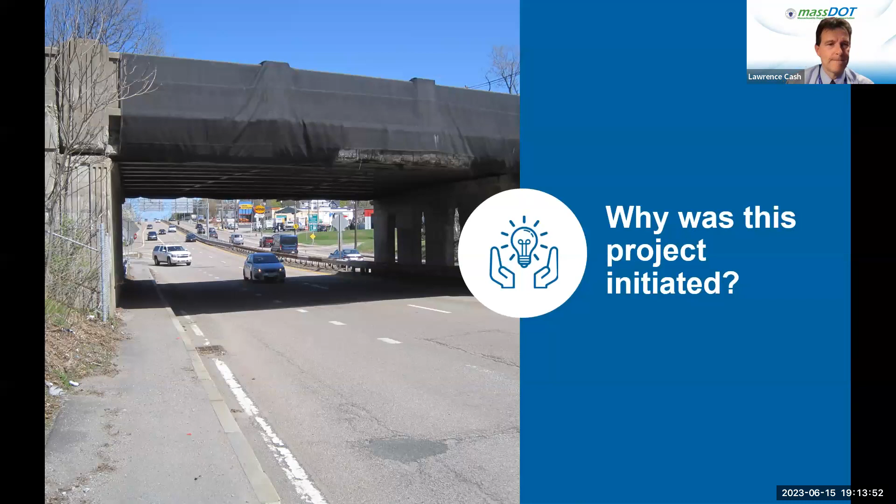This project was initiated first and foremost due to the need to replace the existing bridge, which was constructed nearly a century ago in 1931. The bridge, shown in red on this photo, is currently classified as structurally deficient. Repairs have been made in recent years, but the structure is still in need of full replacement.

The bridge also provides limited vertical clearance along Route 9, restricted to 13 feet 8 inches, and has a center pier in the middle of Route 9 exposed to salt and ice every winter, leading to additional deterioration and subsequent repairs. Knowing that the bridge requires full replacement and will impact the whole interchange due to the required stage construction to maintain existing traffic, and would be costly and a lengthy endeavor, Mass DOT wanted to seize the opportunity to not only replace the bridge structure but also address the other known deficiencies associated with the interchange.

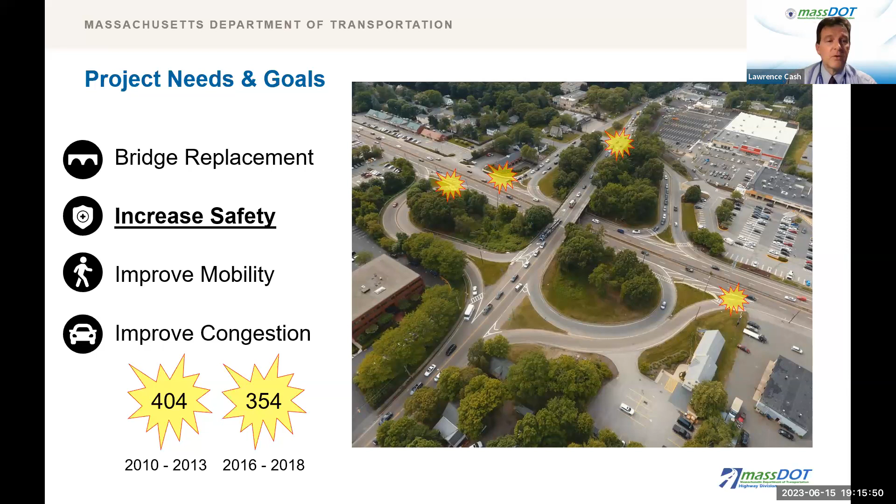While Route 9 is certainly a vital corridor for thousands of commuters every day, we understand that it also functions as a barrier between the residential communities in the south and the destinations, including schools, restaurants, shopping, and other businesses located to the north along North Main Street.

Currently, there are no bicycle facilities throughout the interchange. There is also no continuous accessible sidewalk for pedestrians along the segment of Route 27. This results in a barrier for both pedestrians and cyclists, and a location where there are few options to safely cross Route 9. This project will improve mobility for all users of the interchange.

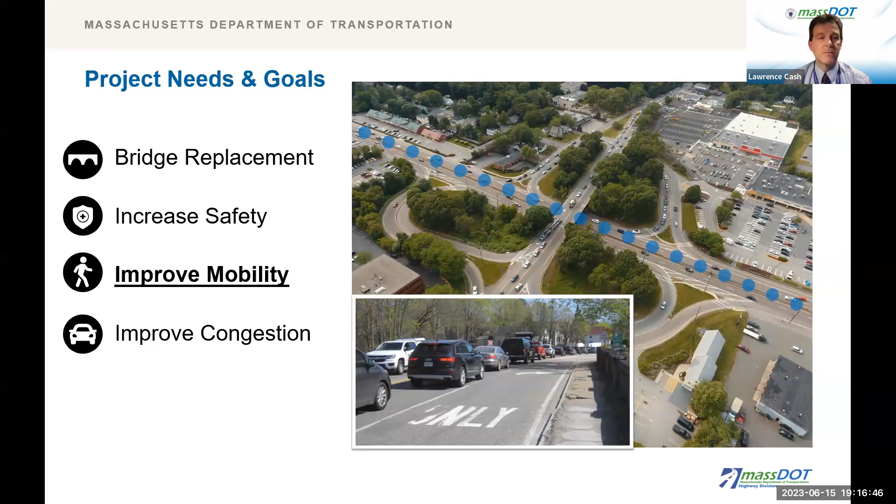As mentioned previously, on average, over 80,000 vehicles travel through this location every day, leading to congestion and delays. A more efficient design is needed to better process this demand while safely accommodating all the mobility needs of the community.

Here we have a drone video taken in June 2018 showing typical congestion in the area during the afternoon peak hour. There is heavy traffic along Route 27 southbound, and the Route 9 on-ramps are backed up as motorists wait for acceptable gaps to pull into the Route 9 traffic. If you look at the ramp toward the bottom of the screen, you'll even see a black vehicle making an illegal left turn, which highlights the frustration and unsafe driver decisions happening in this area experiencing heavy congestion.

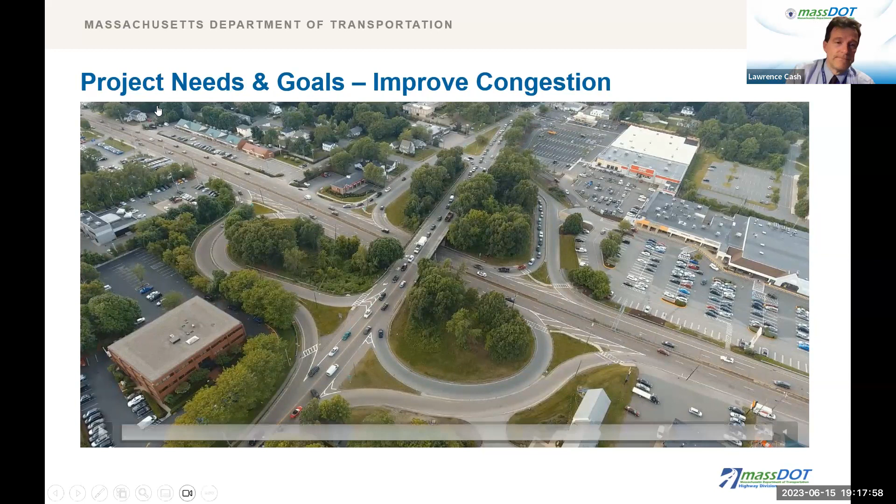So the question is, how do we attempt to solve these issues we've just identified?

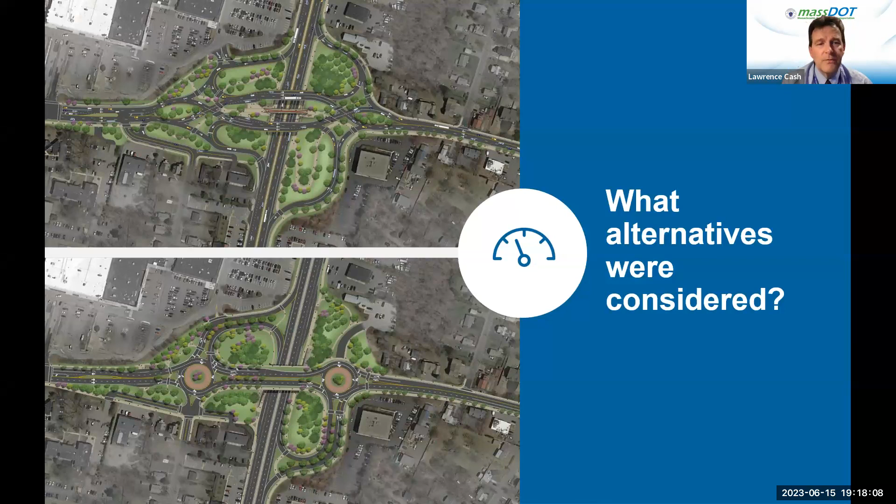Starting at the beginning, the town initiated the design back in 2010, 2011 with another design consultant. Then in June 2017, the design you see here on the right was presented to the public. This design proposed to remove the ramps in the northwest and southeast quadrants, the upper left and lower right portions of the interchange respectively.

Traffic signals were then proposed at the ramp locations along Route 27 to handle not only through traffic along 27, but also left turns to and from Route 9. The design included sidewalks along both sides of the road and on-road bicycle lanes.

The public rejected this design at the 2017 hearing due to various reasons. These included lengthy crossing distances at the intersections for pedestrians and bicyclists, as well as concerns about complex traffic signal phasing, which could result in additional delay, particularly for the left turn movements to access Route 9.

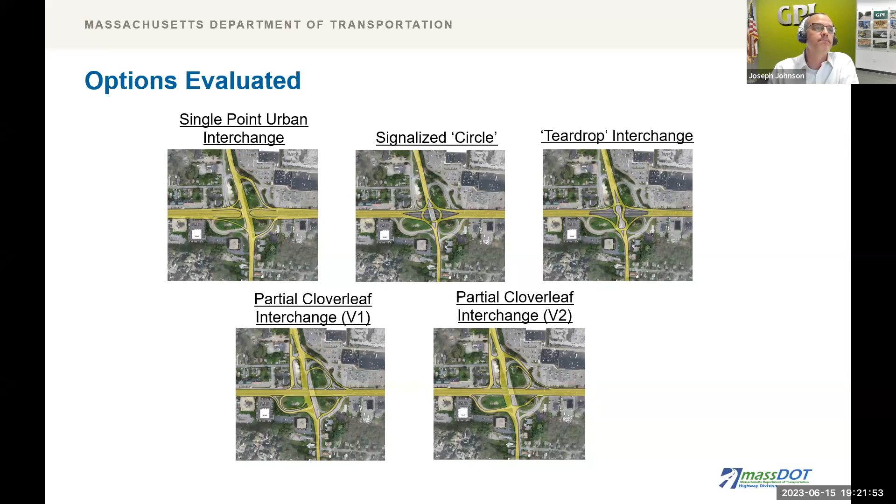The dual roundabout concept implemented a multi-lane roundabout at each interface with the Route 9 on and off ramps. This option eliminated the need for traffic signals, and as a benefit of roundabouts in general, would promote traffic calming while reducing the severity of crashes.

The dual roundabout concept also incorporated improved pedestrian and bicycle facilities throughout the project limits, accomplished using a combination of shared use paths and sidewalks. However, one challenge of this location is the need for multiple vehicle travel lanes approaching and departing the two roundabouts. To safely cross pedestrians and cyclists at multi-lane roundabouts, a modified traffic signal would be needed at each crosswalk. So although roundabouts generally operate under yield control without signals, many approaches would require signalization to ensure pedestrian and cyclist safety at multi-lane crossings.

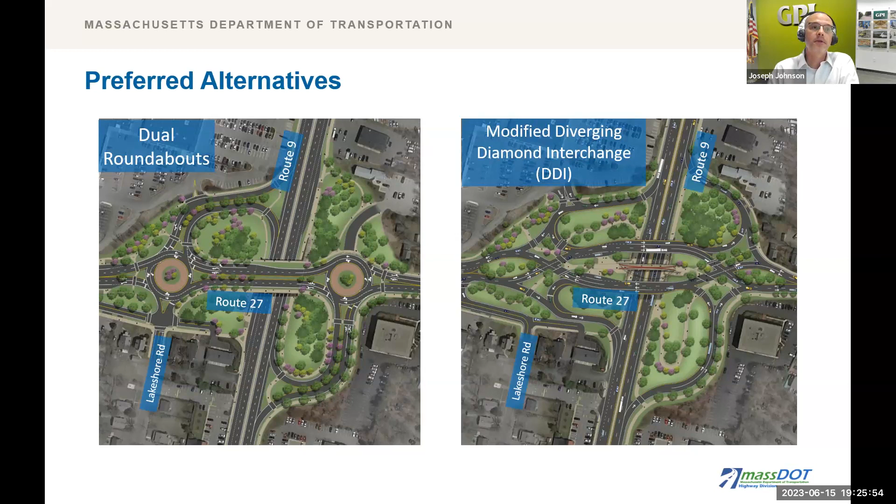These interchanges are controlled by traffic signals on either side of the major roadway, where the opposing through traffic will temporarily cross over to the opposing side of the road. By crossing the lanes of traffic, left turn movements can be processed without conflict, similar to how a channelized right turn is made. Also, since the interchange is controlled by two signals, pedestrians can safely cross to either side of Route 27.

Both alternatives, the roundabouts and the modified DDI, were presented at a public meeting held at the Wilson Middle School in June 2019. After the formal presentation, we broke into smaller groups and attendees were encouraged to provide input via a comment form listing the various goals and needs of the project. These categories included overall safety, pedestrian and bicycle accommodations, traffic operations, accommodation of U-turns, neighborhood connectivity, as well as others.

The previous 2017 design was presented alongside the dual roundabout and modified diverging diamond concepts to provide an array of options. Participants were asked to place red, yellow, and green stickers on each category for each design alternative, with space provided for handwritten comments. A red sticker indicated a negative reaction, yellow a neutral reaction, and green a positive reaction. This information was then gathered and evaluated to help determine the path forward for the project.

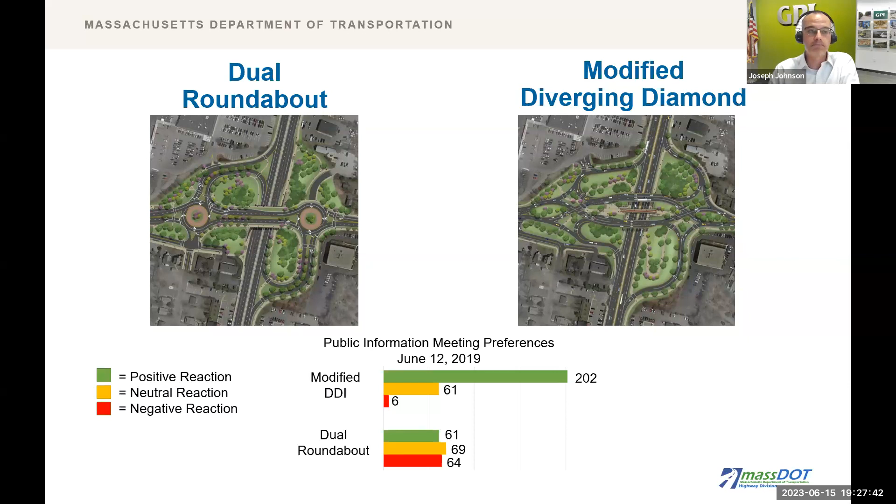One of the challenges with diamond interchanges and similar configurations is the need to process left-turning vehicles to and from the major roadway. This often requires more complex traffic signal phasing, which translates to longer cycle lengths. Additionally, to provide safe crossings for pedestrians and bicyclists, phasing must be added to allow time for those crossing as well. This isn't to say that diamond interchanges are ineffective or unsafe, it's just a different type of interchange with its own operational characteristics.

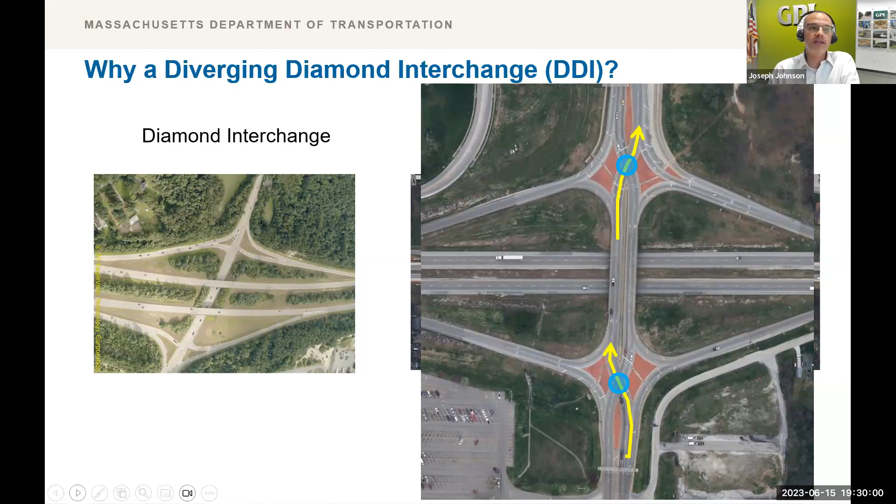So you might ask, what is the point of this? Well, the advantage of using the DDI configuration has to do with the manner in which left turns are processed.

By eliminating this conflict, the DDI can provide greater safety and dramatically reduce the complexity of signal phasing at the interchange. So to summarize, the DDI provides channelized right and left turns to the major roadway, as shown in orange on the aerial image.

As previously mentioned, this interchange in its current configuration has been prone to crashes. According to Federal Highway, total crashes were reduced by 46%, and left turn crashes were eliminated completely by implementing a divergent diamond relative to a traditional diamond interchange. So the DDI at this interchange, rather than using a more conventional configuration, will assist in reducing crashes and improving safety.

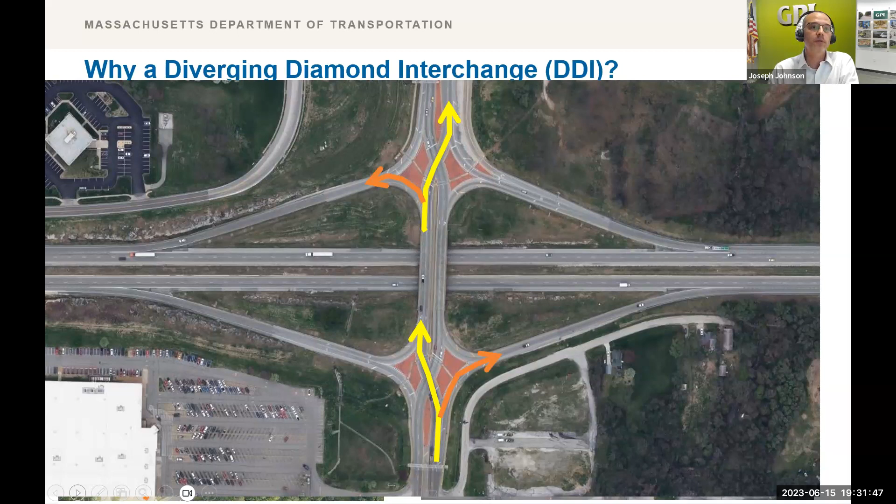When it comes to pedestrians and bicyclists, the DDI allows for crossings to occur at the same time as through traffic, eliminating the need for additional phases. These pedestrian crossings will occur without any conflicts with traveling vehicles.

Now we'll talk about the difference between a traditional DDI and the modified DDI that we are proposing in Natick. As shown on this slide, we overlaid an example of a more traditional DDI to show the impacts of a standard configuration and how that wouldn't work at this location. These yellow circles show how the ramp alignments would severely impact adjacent properties and businesses. These impacts are obviously not reasonable nor feasible. Many DDIs have been built near large, sprawling interchanges over major interstates, where this type of ramp geometry can be easily accommodated. However, when it comes to our location in Natick, we needed something much more context sensitive.

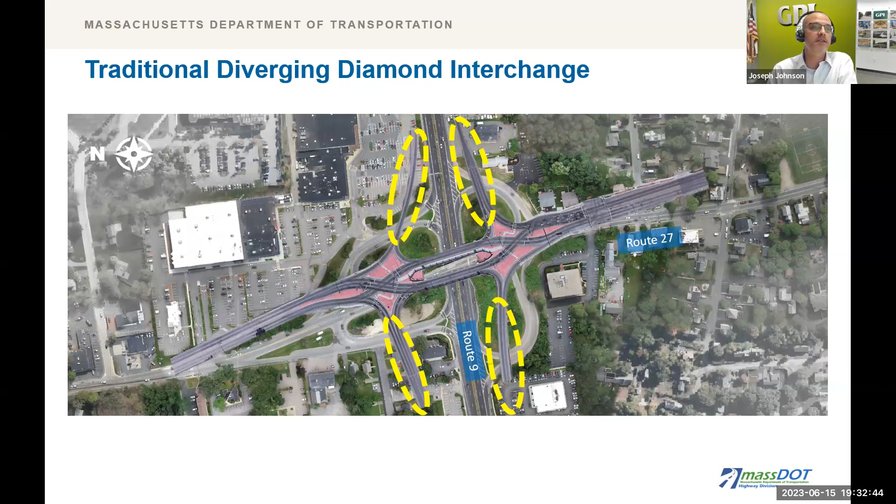At this point, I'd like to transition the presentation to my colleague, Chris, to further explain the details of the Natick modified DDI.

Thanks, Joe. Hello everyone, my name is Chris Howard with GPI, and I am part of the design consultant team for MassDOT. Here we have a rendering of the proposed modified DDI with Route 27 shown left to right and Route 9 shown vertically.

But what exactly does the modified term mean in this sense? Essentially, the ramps and overall geometry have been modified to fit within the available right-of-way as much as possible while still adhering to federal highway design guidelines. This provides a smaller footprint that is much more context sensitive to the Natick community.

Instead of a more typical diamond shape as Joe described earlier, we maintained the basic shape of the existing ramps, but with many improvements to maintain safe and appropriate low speeds on the ramps, while eliminating the stop conditions that exist today. Appropriate acceleration and deceleration lanes have also been proposed along Route 9 to eliminate both the dangerous weaving that exists today and to allow vehicles to achieve appropriate speeds before entering or exiting Route 9.

Before we get too far into the details of this design, we wanted to say that we fully acknowledge an aerial view looking down at a DDI can appear quite complex. However, the driving experience is far simpler than you may assume. So let's jump right into a video showing what it would be like to experience driving through this new DDI.

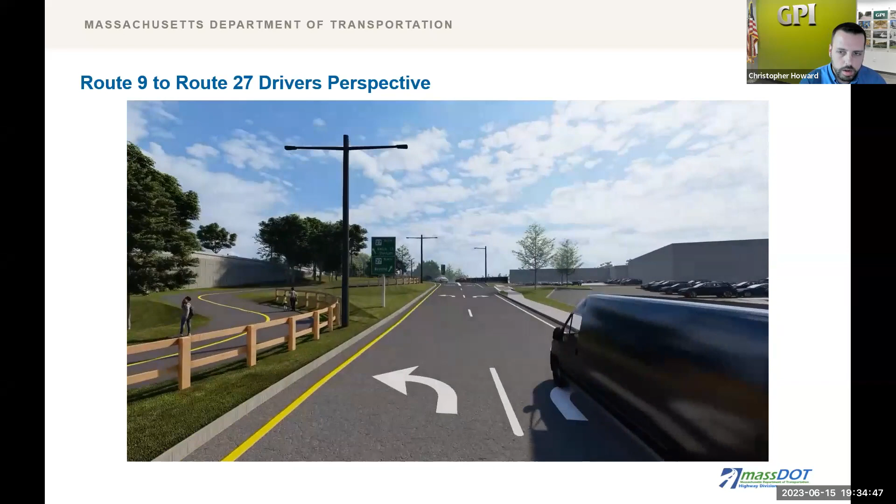As we turn onto the ramp, off to your left, you'll see the westbound bus stop and the new shared use path connecting up to Route 27 through the infield area. On our right is the 927 Exchange Plaza.

We will then stay in the left lane so that we can continue south on Route 27. As we approach the top of the ramp, we encounter the first simple two-phase signal and continue our journey onto Route 27.

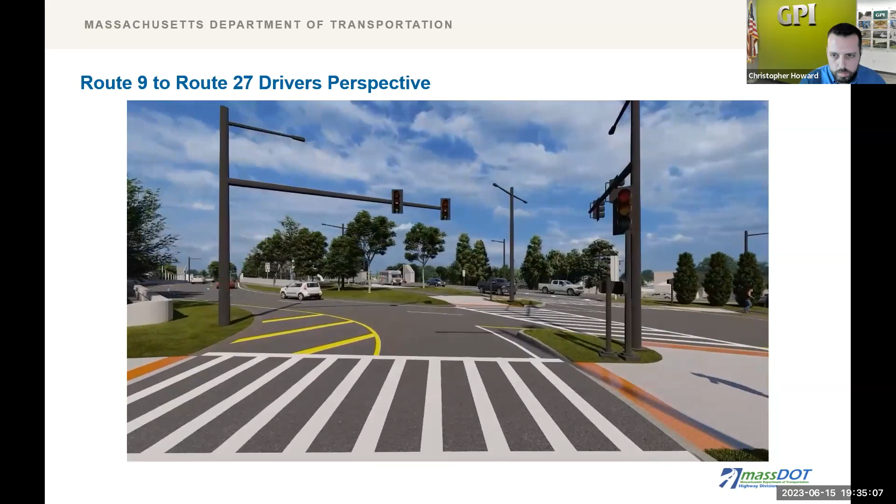Off to the right, you'll see a new bus stop and the shared use path continuing through the center of the interchange with plenty of separation from vehicular traffic.

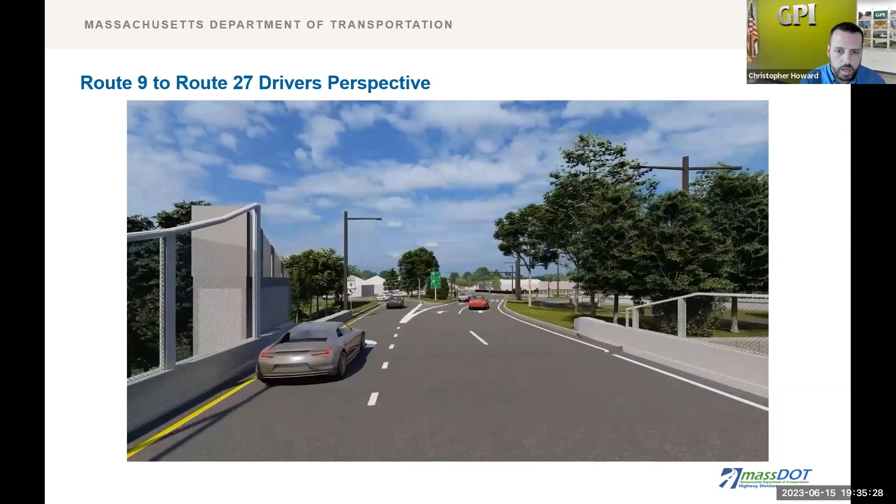As we cross over the new bridge, you'll also be able to see the new signature exclusive bike bridge and pedestrian bridge in the middle. We then continue, and you can notice the easy U-turn provided as we pass by the left turn onto Route 9 East. We now approach the second simple two-phase signal and cross back over to the right side of the roadway and can continue to Natick Center.

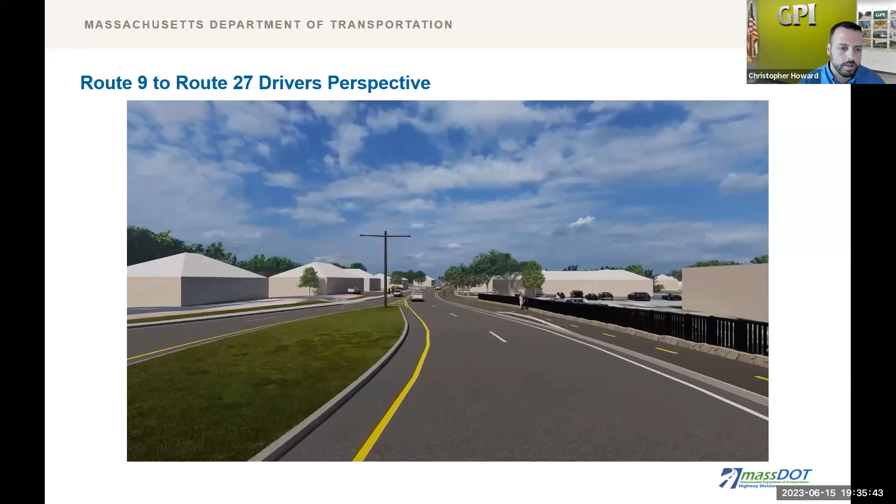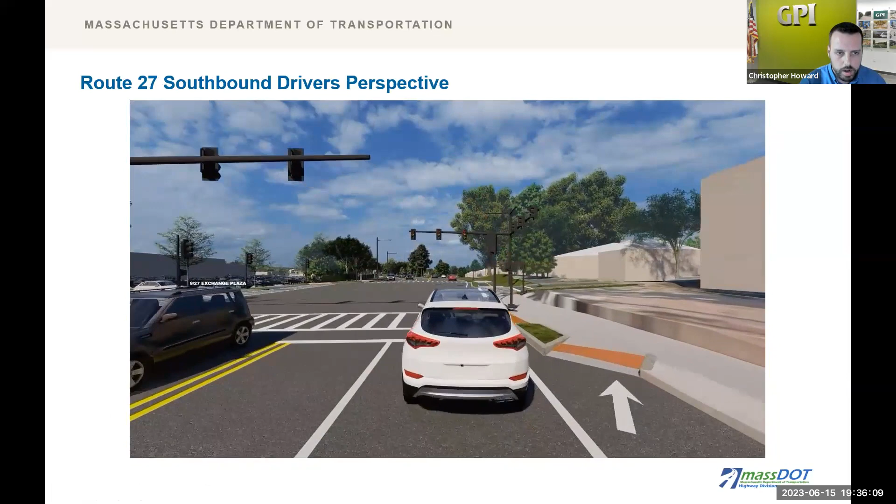Just to really demonstrate the experience, we wanted to show one more video that runs along Route 27 as if we were coming down from the Pike and heading south again towards Natick Center. Here we are at the 927 Exchange driveway on the left, and we will continue driving south toward Route 9. You'll notice the shared use path network on the right and on the left side of the screen as well. This provides safe, separated accommodations for pedestrians and bikes.

Next, we will be coming up to the intersection that would take you to Lakeshore Road. A new queuing area can be seen on the left to allow for easier and safer access from Route 27 to and from Lakeshore.

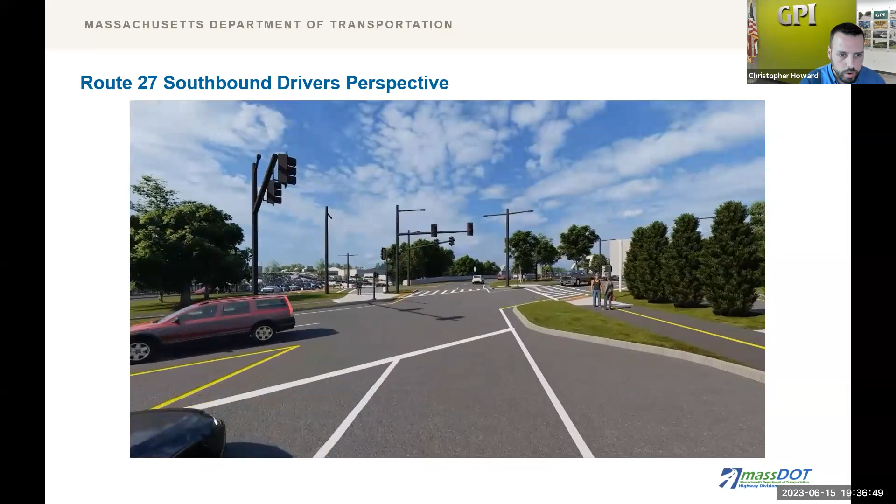We're now passing the on-ramp to Route 9 West, and just beyond that, one of the new bus stops as we approach the northern traffic signal. We continue straight through the intersection, passing by the shared use path, up to the new tied arch bridge. And we would continue on just as we have seen in the previous video.

We hope those videos gave you a feel for what driving through this interchange will be like. It was also important to note that this project has carefully taken into consideration the other major projects that have been or currently are being constructed in the immediate area, tying into the Route 27 project at both the northern and southern limits, blending the project designs together, and minimizing additional work required where these projects interface.

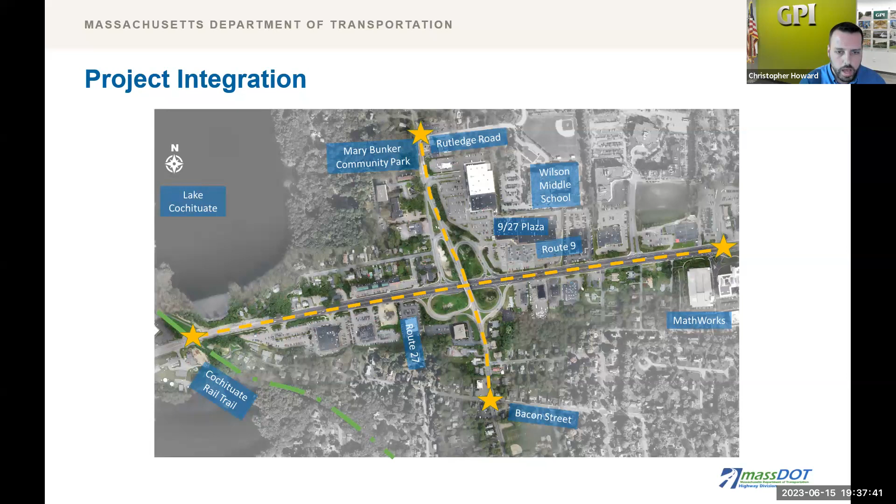We also intend to bring direct connectivity to the Cochituate Rail Trail shown on the left side of the screen via shared use paths and extending improvements that were made along Route 9 as part of that rail trail project as well.

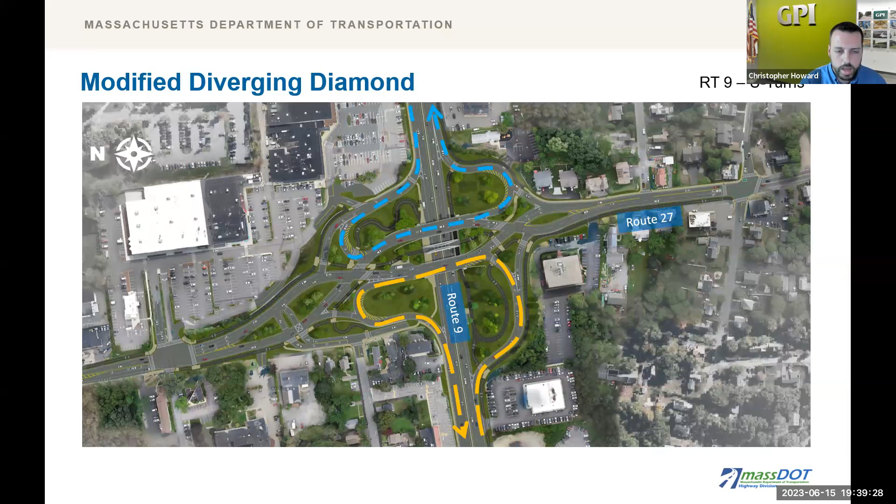As part of the 2019 meeting, it was noted that a lot of vehicles along Route 9 use these interchanges to reverse direction, essentially performing a U-turn. By making these movements as simple as possible, it minimizes the impact to more local traffic on Route 27. In this instance, vehicles traveling either east or west on 9 can take the off-ramp, head over their respective bridge, and turn back onto Route 9, reversing direction. This is a much more efficient movement than if this were a traditional diamond, and adds to the benefits the DDI brings to this location.

We hope we've provided some insight on how to drive through this interchange, but we want to highlight the truly multimodal advantages this design brings as well. Providing safe, high comfort facilities for pedestrians, bicycles, and transit users continues to be exceptionally important to MassDOT, and this modified DDI design really exceeds on that front as well.

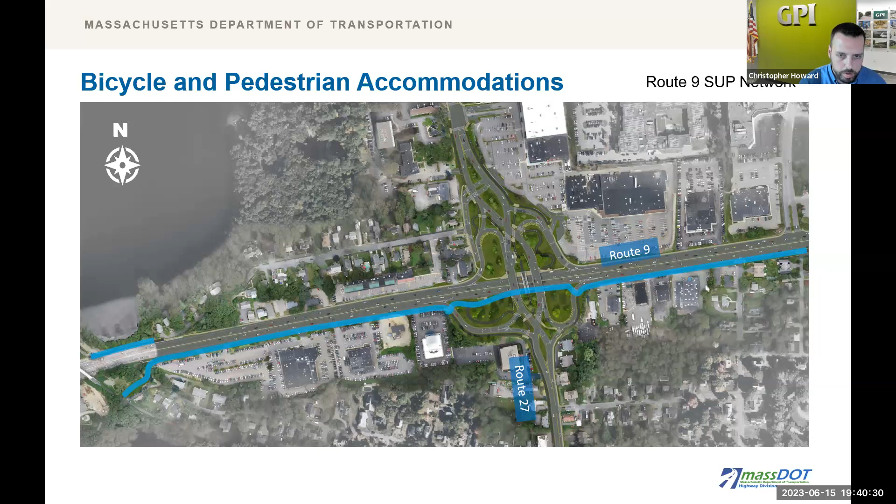And here we have rotated the image 90 degrees to now show Route 9 horizontally. The project provides a shared use path along the entirety of Route 9 East, connecting the Cochituate Rail Trail at the western limits all the way to Linden Street and the MathWorks campus in the east.

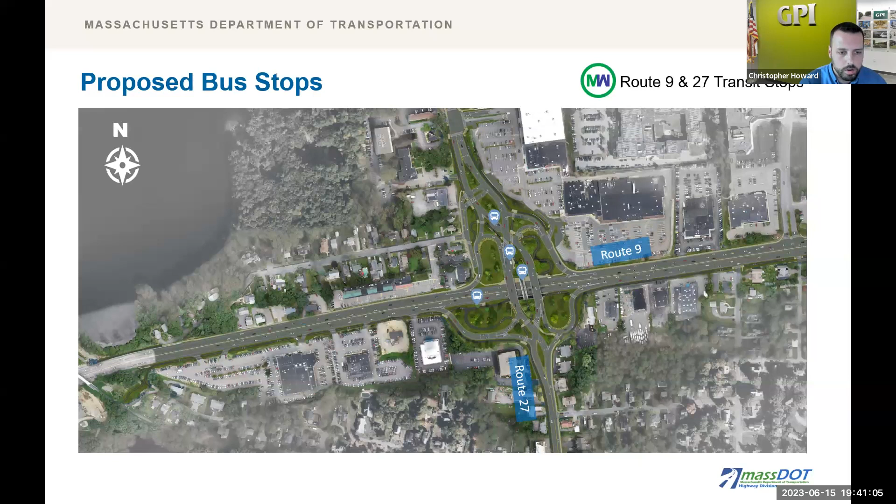Currently, the Metro West Regional Transit Authority, also called the MWRTA, has two routes that run through the project limits. One along Route 27, picking up and unloading passengers in the 927 Exchange Plaza due to there being no formal stops along Route 27 in this area. The second route runs along Route 9 and stops on either side of the interchange, depending on direction. Currently there is no connectivity between these two routes, but we aim to change that by providing formal stops along Route 27 and using the shared use paths and sidewalks to provide a link between both routes.

You may also recall one of the issues noted by Larry earlier in the presentation was that the existing bridge provides low clearance over Route 9. All 3 new bridges will be constructed approximately 4 feet higher than the existing bridge, to align with federal highway guidance for clearance on Route 9 and allow elimination of the pier that sits in the middle of Route 9 today. This will provide extended durability for the new bridges, keeping vital structural components further from road salt during winter months. The guardrail separating Route 9 will also be replaced with concrete barrier, extending the improvements that were installed as part of the Cochituate Rail Trail project to the west.

Roadway lighting will also be enhanced to provide safer accommodations for all users as well.

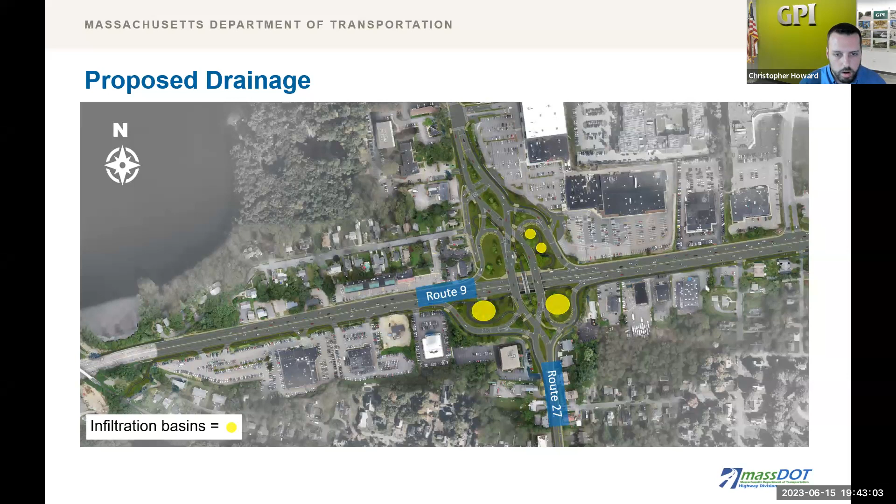The design has gone through several iterations to get to this stage, and we continue to make refinements. It was noted in the comments received at the 2019 public meeting that access to Lakeshore Road as part of the DDI was still a concern.

The area was revised to provide a 2-stage approach for accessing Lakeshore Road more safely. The design has had several outside reviewers during the design process, including MassDOT and other consultants considered DDI experts in the industry.

Mitigating impacts to private property continues to be extremely important. While eliminating every impact is not feasible with such a transformative project, we continue to refine the design wherever possible to minimize them. This project's design occurred during the height of COVID, in which traffic was very low compared to pre- and post-COVID times.

New traffic patterns have been evaluated to ensure the design is still appropriate and adequate. Extensive utility and geotechnical investigations have also been performed to minimize unexpected impacts to utilities or other structures during construction, which would otherwise typically lead to additional delays.

And now let's take one more look at the design via a bird's eye view of the entire project. We begin positioned above Route 9, looking east toward Boston. The 3-bridge design is centered, and as we rotate around, the interconnected shared use path and sidewalk network becomes even more visible.

We end up over Route 27, looking north, and could see the first crossover leading up to the new bridges. The 9/27 Exchange Plaza can be seen off to the right as we continue over Route 9 and through the second crossover, leading up to the improved connection to Lakeshore Road.

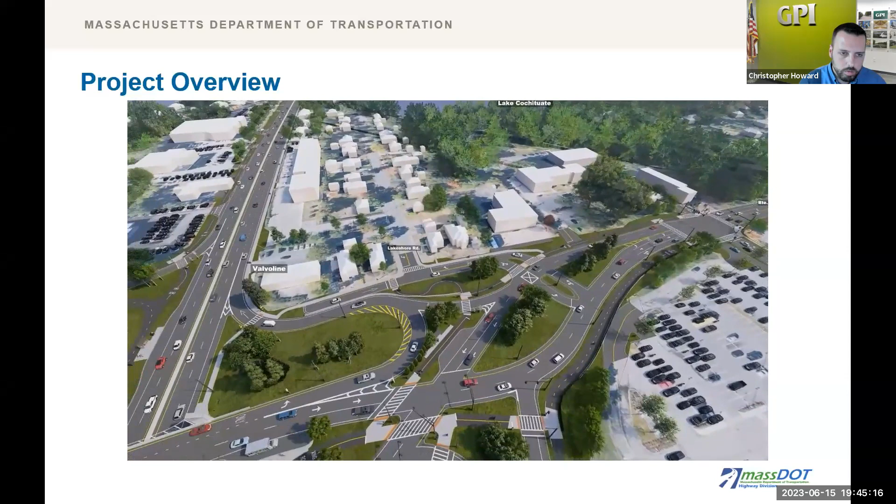As we pan back out, the entire project comes into view: the modified diverging diamond interchange carrying Route 27 over Route 9.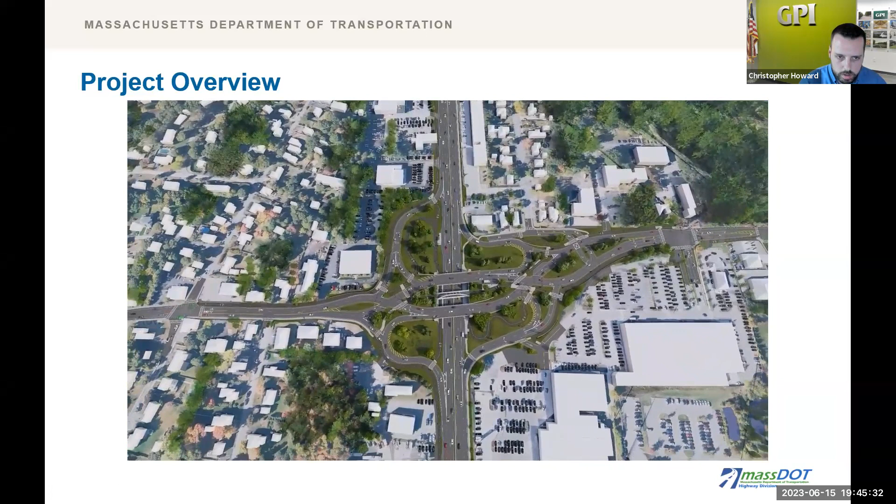At this point, I'd like to hand it off to Melissa to discuss the right-of-way aspects of the project. Thank you, Chris.

Good evening. My name is Melissa O'Day, and I represent the Right-of-Way Bureau of the Massachusetts Department of Transportation Highway Division. The Right-of-Way Bureau is responsible for acquiring all the necessary rights in private and public lands for the design, construction, and implementation of this project.

Affected property owners have been contacted by personnel from the Right-of-Way Bureau representing Massachusetts Department of Transportation Highway Division. The procedures used must comply with state and federal regulations governing the acquisition process. Affected property owners' rights are protected under Massachusetts general laws, primarily Chapter 79.

If a project is receiving federal funds, the property owner's rights are further defined under Title III of the Real Properties Act of 1970 as amended. All right, thank you, Melissa.

What are the environmental, cultural resource, and community impacts? Regarding environmental impacts, MassDOT will be coordinating with the MEPA office to determine reviews that may be required. We will also be filing a categorical exclusion checklist. There will be no work within or alteration of jurisdictional wetland resource areas.

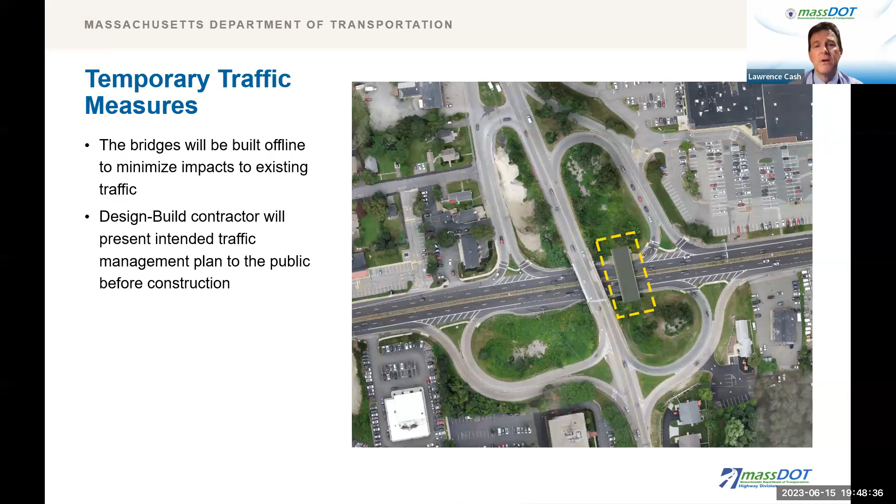Construction impacts: access will be maintained during construction. Existing pedestrian facilities will be maintained, along with access to businesses, access to Lakeshore Road, and access to existing traffic during peak travel times.

Temporary traffic measures: pedestrian detours may be necessary. Nighttime rolling roadblocks could be necessary for erection of beams, or even closures on the Route 9 section as a rolling roadblock, just for the installation of anything overhead on the bridge structures. No planned road closure on Route 27, as traffic will be maintained.

Now for project delivery, as we said, we plan on using a design build procurement. Design build combines the design and construction services into a single contract, authorized for department use under Massachusetts General Law 149A, subsection 14 to 21. This allows the contractor and designer to work together on all phases of the project.

What I wanted to ask about is the design program you described. Maybe you could put up the slide showing the modified DDI. One question that's particularly important to Bernardi Volvo: it appears that with this design, a customer exiting the Volvo dealership, which is right by the ramp where you're zooming in, on the ramp traveling eastbound, will have no choice but to get onto the exit ramp of Route 9 and travel south on Route 27, because it looks like you're changing the curbing. I thought I saw a bus stop right there on Route 9, so they're not going to be able to continue east on Route 9. Is that correct, or are we misunderstanding the design?

I can start, Joe. I believe right there on the bottom of the screen it's just showing a little bit of a deceleration lane onto the ramp. I'm not quite sure where the driveway is located there, it looks a little bit further down on the page, but that's what I'm seeing.

Yeah Larry, I can chime in. That configuration is actually going to be quite similar to what exists today at the Volvo dealership, where there will just be striping for that exit for the off ramp, but no curbing, so access to Route 9 eastbound will be provided. They'll just have to pull across the decel lane, which is a similar situation that exists today.

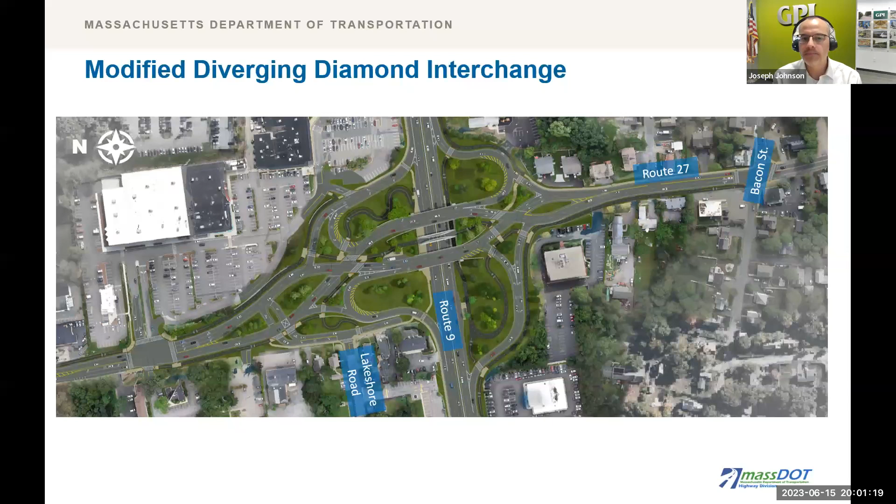I appreciate that. So you guys have studied that driveway, which is right there just off the picture, and you're satisfied that a vehicle will be able to pull out, make a right and go eastbound, and have enough opportunity not to be forced into the deceleration lane and then forced to go up to Route 27 southbound? That's correct. Yep. That's correct.

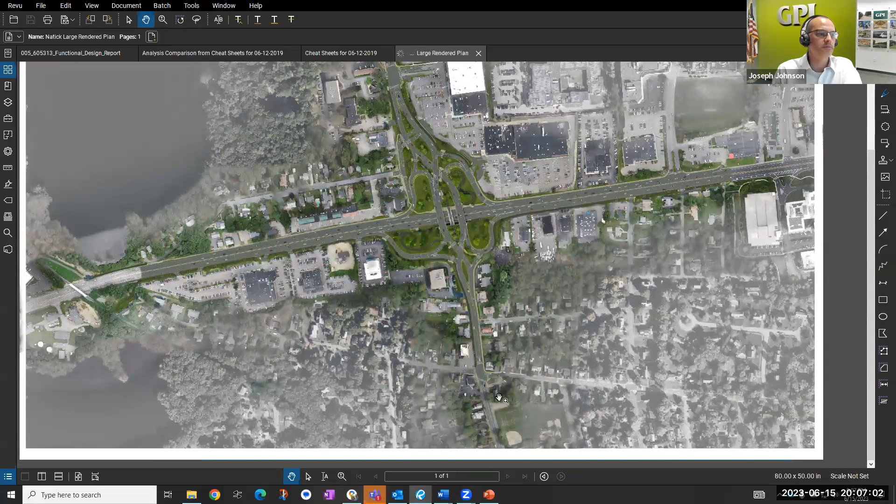Okay, can you see my screen? Yes. So here's the interchange as a whole. I thought it'd be easier to show in one large plan here. The question is relative to North Pleasant Street, which is right here, and Bacon Street at the bottom. I believe the question is whether or not this would become a dead end street, and the answer is no. We're looking to maintain that connection as it exists today, there will continue to be access here.

Some of the changes occurring in this location: we'll now have two southbound travel lanes continuing from the interchange all the way down to Bacon Street, and we'll continue to have the one northbound lane. So we'd expect less queuing to the Bacon Street intersection, and less queuing for the interchange as a whole. Hopefully that addresses the question on North Pleasant Street.

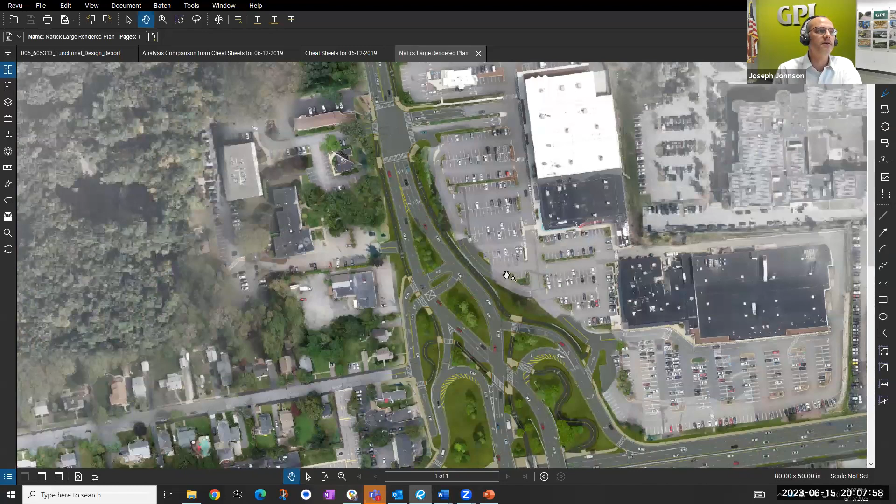Now if we take a look up at the Dunkin' Donuts, this is the signal at the 9/27 Exchange Plaza. We are not looking to make any modifications to the access to the Dunkin' Donuts, right here. That will still occur through the site. If I'm not understanding that, please feel free to chime in, but we're not intending to make any changes there.

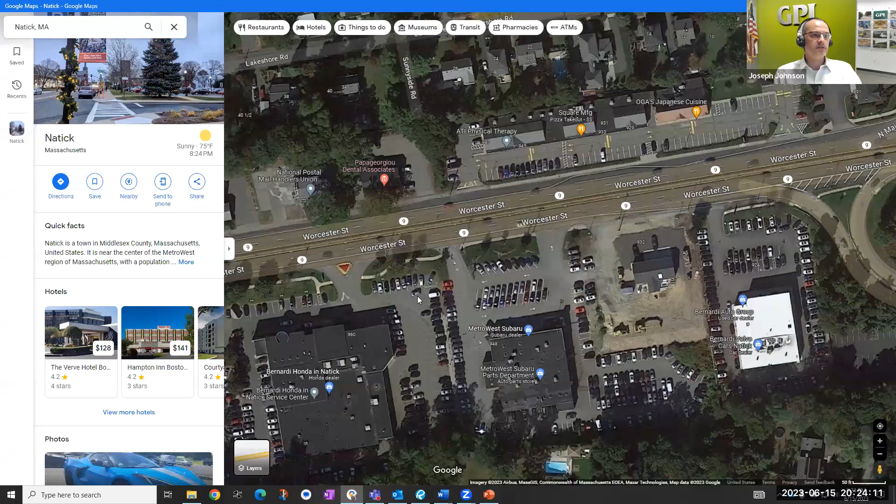Okay, so we're talking about all the dealerships essentially over here to the west of the interchange. Just looking at the existing condition, hopefully you can see the Google image here. Right now there's just a wide shoulder for much of the stretch, and there's a short, substandard decel lane right here to get off. Here's the Volvo dealership.

One of the objectives of the project was to provide a safer deceleration lane length. We want to extend this lane further because you're coming off a road posted 50, into a 25-mile-per-hour curve. There's really not enough distance to come safely to that reduction in speed. So you'll see in the proposed scenario here that we've extended that decel lane, so it's further. That provides a more comfortable decel for folks exiting Route 9 eastbound to get off.

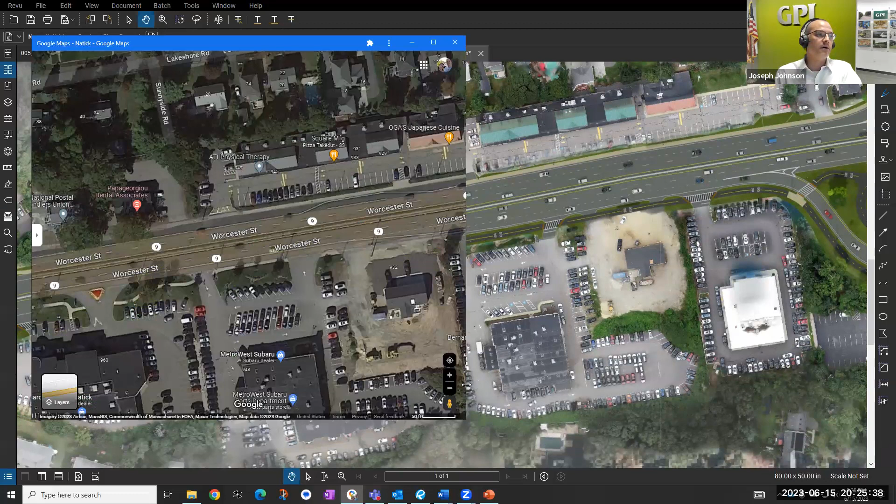Now, I understand the concern is pulling out of this driveway, for instance, or any of these. It was a large shoulder, just a wide shoulder, and now we're striping a lane. Right now, whether or not people utilize this shoulder for decel, that may or may not happen today even though it's striped to be very short. My guess is folks may enter that lane prematurely, knowing it's very short. But another thing to consider is that as someone pulls out from this driveway, you actually have a lane to travel in to merge into Route 9.

There will obviously be vehicles slowing down sooner, but I think in general we're hoping to improve the safety along Route 9 and the decel to get off. Our hope is that by providing this lane, when you pull out, you'll actually have a lane to travel in rather than a shoulder to accelerate. You'll obviously need to wait for gaps to pull out like any driveway on Route 9, but our hope is that you'll be able to pull out and make the maneuver you want to get onto the main line.

Now, I understand the comment about a roundabout. If we had a roundabout here, someone could get off—hopefully you can see my hand pointing—and come through here, travel through a roundabout, and get back on. I understand what you're saying there. To make that type of maneuver in this configuration is possible, but you'd need to be familiar with it: you come out, take the left, come here, pull that U-turn, and then come back down and get on. So it's physically possible, but not as convenient as having the roundabout.

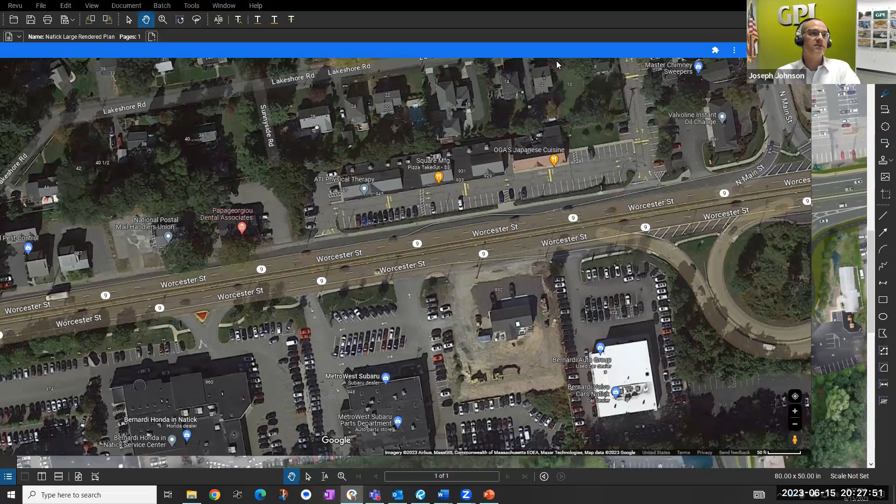But compared to the existing condition, where you have that driveway in close proximity, it's not much different for the Volvo in terms of getting out and trying to get onto the main line, choosing an acceptable gap. Hopefully with that longer lane, folks will actually be pulled over and traveling at a slower speed by the time they get to this driveway, rather than someone pulling off very quickly right where someone might be trying to pull out.

So by having a longer decel lane, hopefully that will improve the situation. Plus, Joe, the gore area is all open too, which is the same as the existing condition. So even if they traveled that far, they can still go through the gore to get into the travel lane. But I'd say exiting those driveways is going to act more like an auxiliary lane, where some vehicles coming out of the driveway are accelerating and merge left, while other vehicles are slowing down to get off this roadway onto 27. So it almost seems to act more like an auxiliary lane, and that's really what they're designed for—those type of movements off the main line.

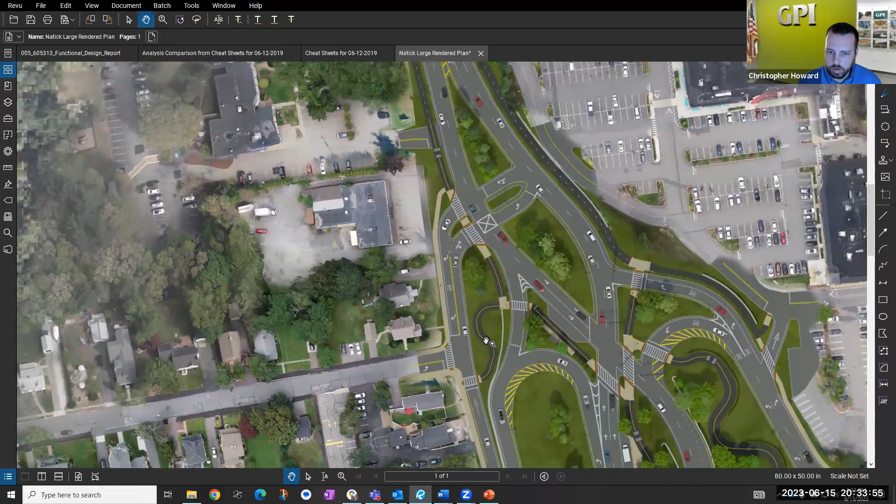And then the other question regarding that same intersection, will the merging ramps towards Route 9 have stop signs at the end, or will it be a yielding merge with flowing traffic, so you don't have to stop and back up getting onto Route 9? My concern is that Valvoline at the corner of Route 9 West, the entrance is actually from Route 9. So my concern is either they change the entrance and have to do something coming from Lakeshore Road, or the impact it might have if it's a complete moving merge to get onto Route 9, the potential for accidents of people trying to get into that driveway with a merging on-ramp.

Okay, so we can start with the question on Lakeshore. I can go over how the access is going to work there. Here's Lakeshore Road. As you mentioned, if you're coming out of Lakeshore, you'll have to take a left here, then proceed to a stop sign where you can either take a right to get on Route 27 southbound, or access Route 9 westbound, or get to Route 9 eastbound by heading southbound. So you'd take the right here or go through to access Route 27 northbound. It'd be a two-stage movement: come here, take the right only or go through considering one direction, the southbound 27, then get to the second median and refuge in the middle, and then consider the northbound traffic to take your left to continue north.

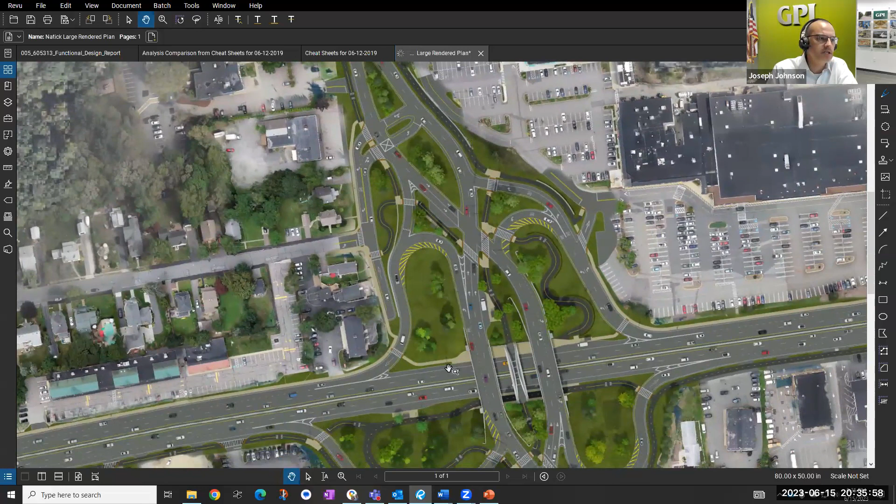Regarding the Valvoline, let's see, here's that driveway you're mentioning. Right now that's a tough location because it's very close to the bridge. It's a tough condition in the existing condition because it comes up very quickly after the bridge. The best way for someone to get to Valvoline, if you're heading Route 9 westbound, would be to get off prior to making this little maneuver, continue up Route 27, and take this turn so you could access it from the ramp. That would be the best way to access that site, because it's so close to the bridge, and it comes up very quickly once you get to the bridge.

So that would be the recommended way if you're on the Route 9 westbound main line, to get off earlier, come up, take this left, and then come in that way, because it's so close to the bridge. But you also had a question about this ramp, as you come on Route 9 westbound from Route 27 southbound. To get on Route 9 west, you'd yield to motorists coming up and getting on from Route 27 northbound that want to get on Route 9 westbound. This movement would yield to that movement here, taking that left turn. Then there's no yield, it's just an acceleration lane. If you're going to get onto Route 9 westbound, part of the issue today is there's very little acceleration lane.

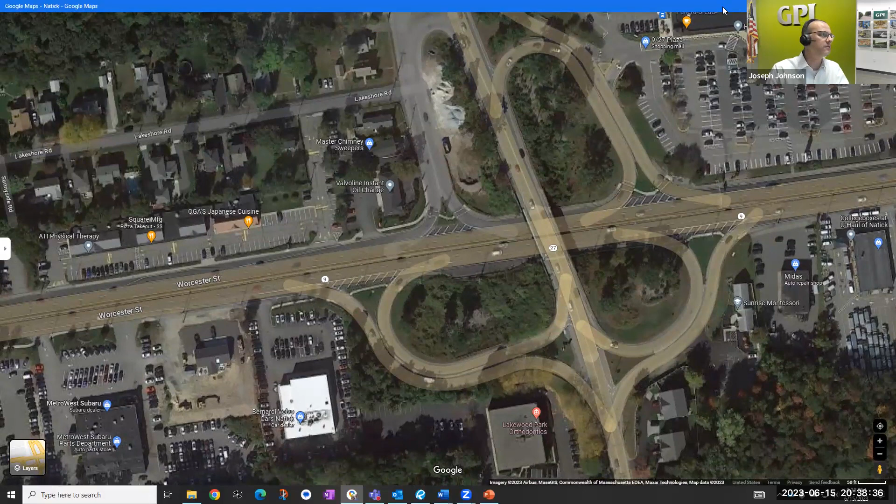So we're actually providing a legitimate standard acceleration lane so that folks will accelerate before merging into the main line. That will help prevent the backups we see today, where some ramps getting on were under stop control. It was very difficult to pull out onto Route 9 main line with very little acceleration length, going from a stop condition to 50 miles per hour. So we're looking to improve that by providing proper acceleration and taper lengths so you can merge back into the main line. Hopefully that answers your questions.

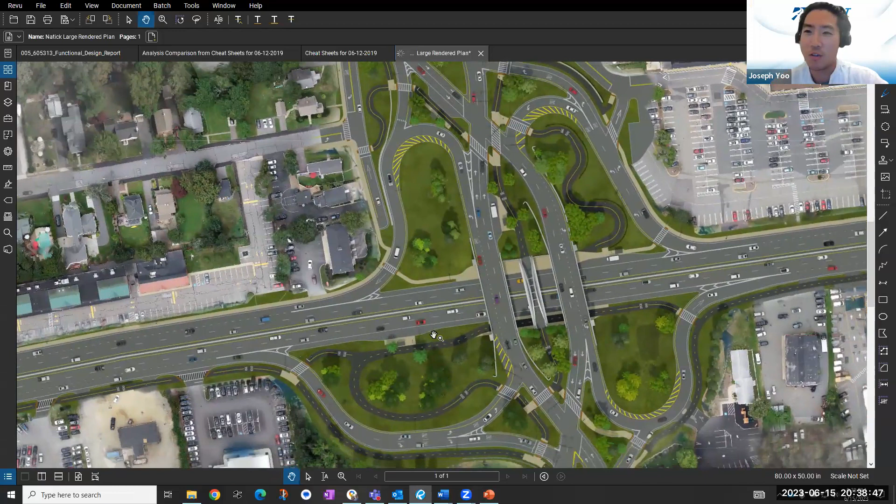Can you hear us? Yes. Wonderful. We apologize for earlier problems.

No worries. I'm Dick Miller, also known as Richard Miller officially, and I have worked in past years very well with Mass DOT, both on Natick town committees and as executive director of the Lake Cochituate Watershed Association. My wife Jill and I were spark plugs to start the Cochituate Rail Trail project. I've worked on it for some 20 years. You've been helpful on all of those. We appreciate it. And we also live on Lakeshore Road.

Lakeshore Road, as you know, only has the exit at its east end. It is sealed off from Route 9 at its west end, and I think it would be a disaster if that ever changed. It's a regular route for pedestrians and bicyclists on the way to the rail trail, but for cars it would be a disaster. It would be an attractive alternate route that the street isn't capable of handling.

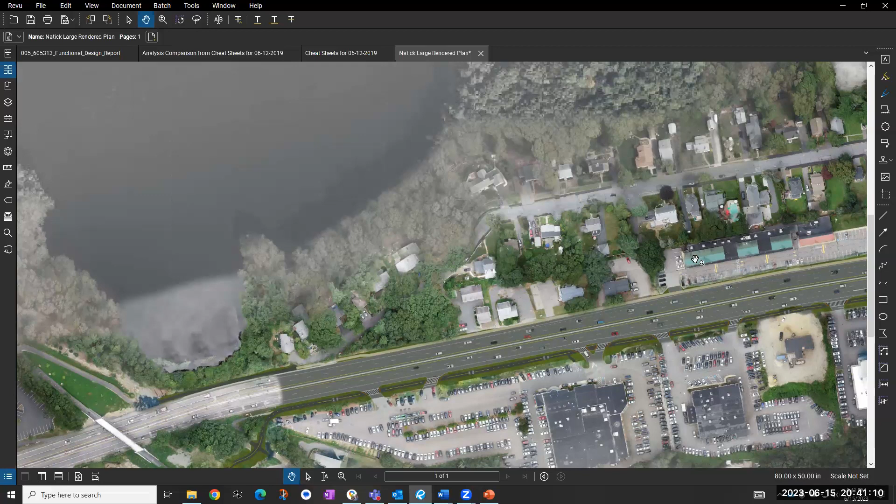And so that holds all year round, it's a problem. When and if you clear it out, from there it's all downhill on a brief, steep slope into Lake Cochituate, whose water Natick drinks. So I hope you will pull it rather than see which pesticide tastes best. And I think you can do a good job of that sooner.

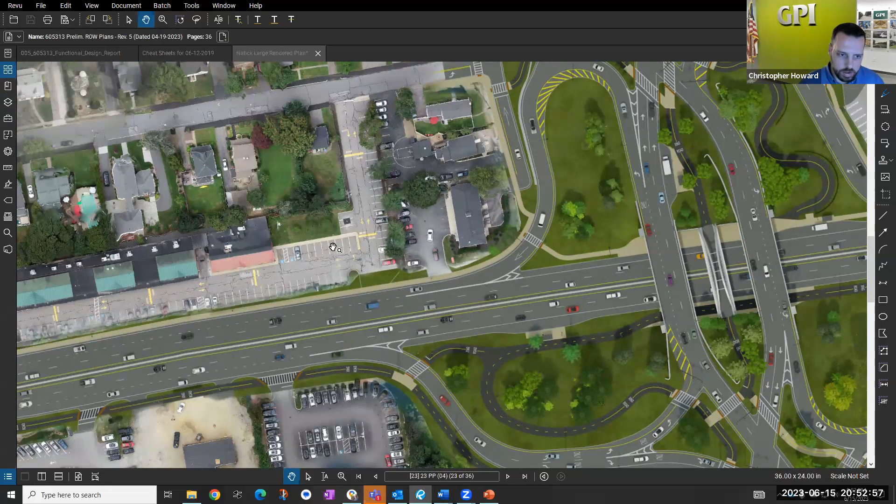Okay, so yes, I understand the confusion, and this is an error in our rendering that we will fix. The intent is not to close off that entrance. In our latest design plans, which I'm sure Joe is also confirming, that entrance is still open. I believe this was just an inaccurately colored area of the project, unfortunately.

Where is that, Chris? Can you zoom in? Right there. Yes, you can see the line work of the opening is still there, but it was incorrectly hatched green. We will fix that. In the latest design plans, it is not being closed off. I just confirmed on the plans that is a mistake here. So thank you for pointing that out and bringing that up.

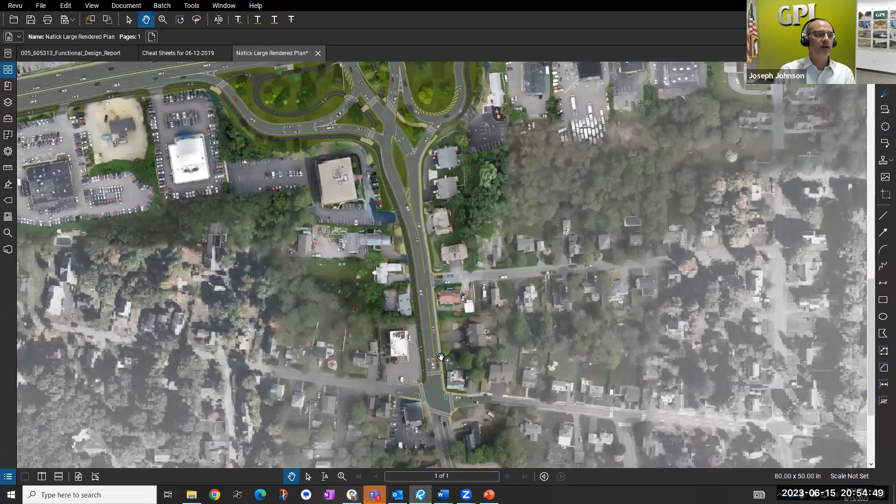So yes, a lot of this traffic issue down at Bacon Street will be addressed by that other project. Based on our simulation and modeling, we see that the queuing southbound will not extend into the interchange, causing the issues like it does today.

Thanks, Joe. We have a couple questions from Stephanie regarding flooding. There's two locations Stephanie points out, which is Route 9 from MathWorks to Oak Street, as well as the excessive flooding that she notices on Linden Street.

Linden Street, that is not a dead end from what I... Can you just zoom in there? We're near MathWorks, closing, right there. So Linden Street's still gonna be open, correct? Joe? Chris? That is correct, Larry. Yep, okay.

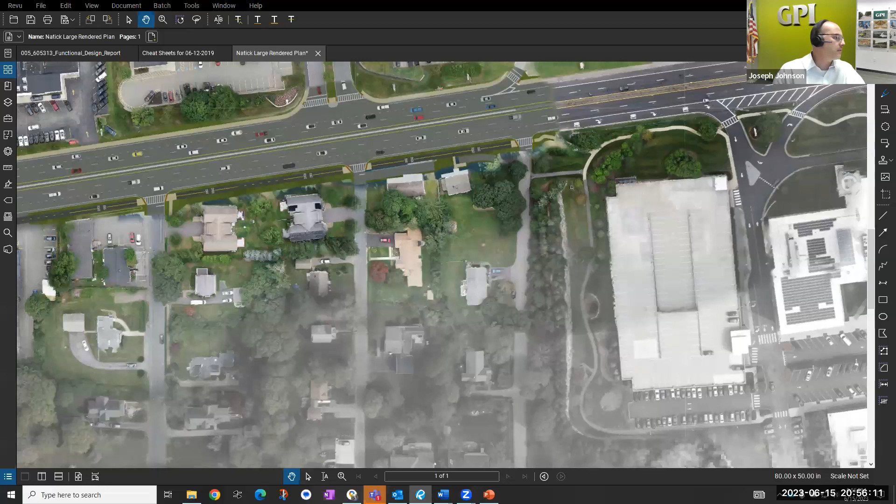And I think speaking to the question about drainage along—let me just see, was it regarding drainage along Route 9? Certainly we're greatly improving the drainage along Route 9 itself. Chris, do you want to speak to that? Yeah, unfortunately the Oak Street intersection is beyond our project limits, so we are addressing the issues within our project limits along Route 9. It would certainly have to be up to another project to handle issues at Oak Street. We are definitely aware of the flooding issues that occur out here at the interchange, which we will address as part of this project. But Oak Street is outside of our limits, unfortunately.

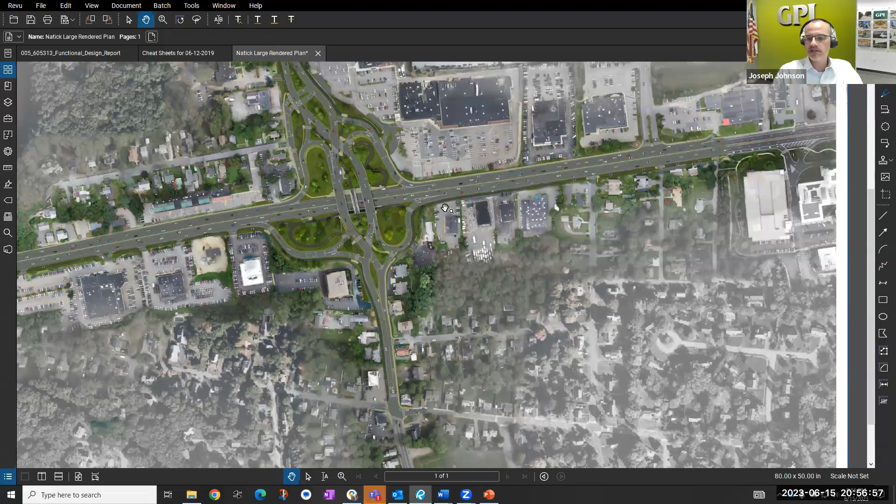I think, gents, that she meant the Linden Street entrance to Route 9. Is the answer the same, that we're going to be providing stormwater management to the maximum extent practicable at this location, or is there anything specific the project aims to accomplish here? Again, we will be providing drainage improvements throughout the corridor. However, I would understand if Linden Street were being closed off, maybe there was a misunderstanding that there would be drainage issues, but we are not planning to close off Linden Street, so the drainage should continue to be able to flow as it does today.

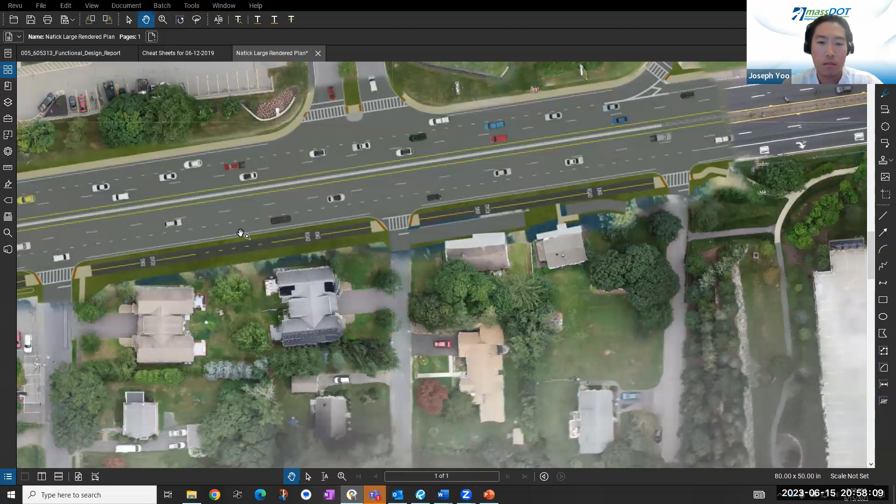Great, thank you. We have a question from an anonymous attendee asking how long the nighttime work is expected to take, with concerns about the nearby homes and the noise from construction. Who was that, Joe? One more time. This attendee has questions about the noise with construction, and asking how long nighttime work is expected to take.

Yeah, nighttime work is only used as necessary. We'll have to review what we're going to be putting in terms of the allowable work hours, but in general, we try to keep the standard work day, being around 7 to 3, maybe a little earlier, then 3:30 in that range. But depending on the volume of the roadway...

There might be required nighttime work, like erecting of beams, maybe related to the bridge over Route 9, there might be some night work there, because that's the least amount of traffic during that time. Sometimes even if there's trench work in a really difficult location, we might have to have some special requests for nighttime work. So we do our best to try to keep it to a minimum, but in a big project like this, there would be some sporadic night work.

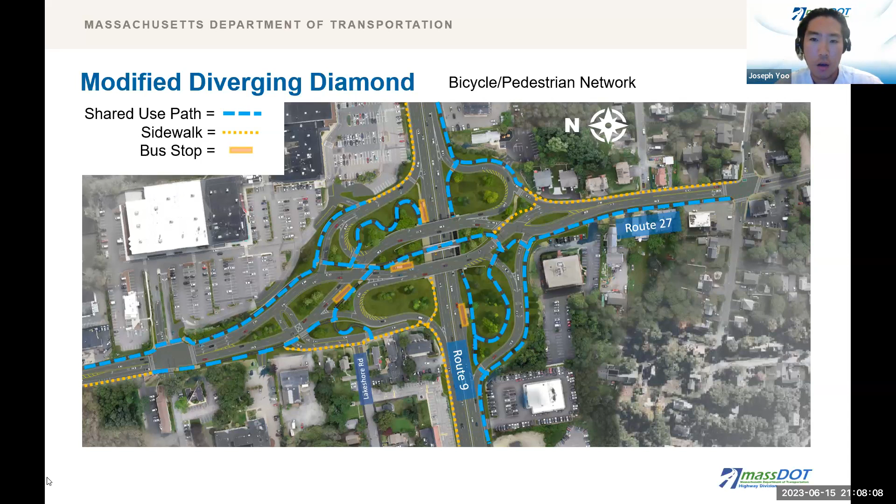Well, appreciate the thought process and trying to take in this attendee's suggestions. We have a couple more questions in the Q&A box.

We have an anonymous attendee who asked earlier about the telephone poles. Will the placement of the support cable for the pole be where our fence is? The project team mentioned that the fence might have to be re-erected with the cable running over it, and they're not okay with that. We'd have to see the location - it's one of these where you probably want to talk to the right-of-way agent and we can get some clarification there. But we'll take note if we can get that property. Is the property listed there? It is not listed there. Okay, reach out to the right-of-way agent and we can take a closer look at that, but I assume they're talking about the guy wire.

We have a question from Josh asking, when will you identify project staging areas? Well, similar to what Joe mentioned earlier, until we get the contractor on board and know exactly what they will be building, then at that point, as part of public outreach, they will go through brief presentations on how they plan to build the project. There will be public outreach as part of the project, as most design-build projects do.

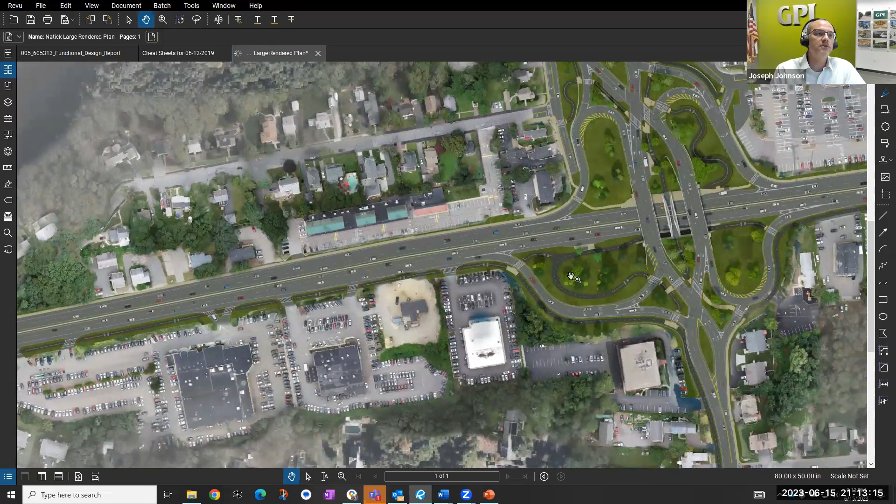The cement concrete sidewalk continues on the north towards the interchange, and the shared use path continues on the south side towards the interchange. As we continue east on Route 9, the sidewalk continues on the north side to our project limit, as well as the shared use path on the south side. At this point, the shared use path on the south side terminates right at Linden Street, where it ties into the MathWorks sidewalk. That's the limit of the sidewalk or shared use path on the south side, and the sidewalk terminates on the north side at our project limit. So it provides a continuous sidewalk through the project length, and it connects to the existing sidewalk on the north side.

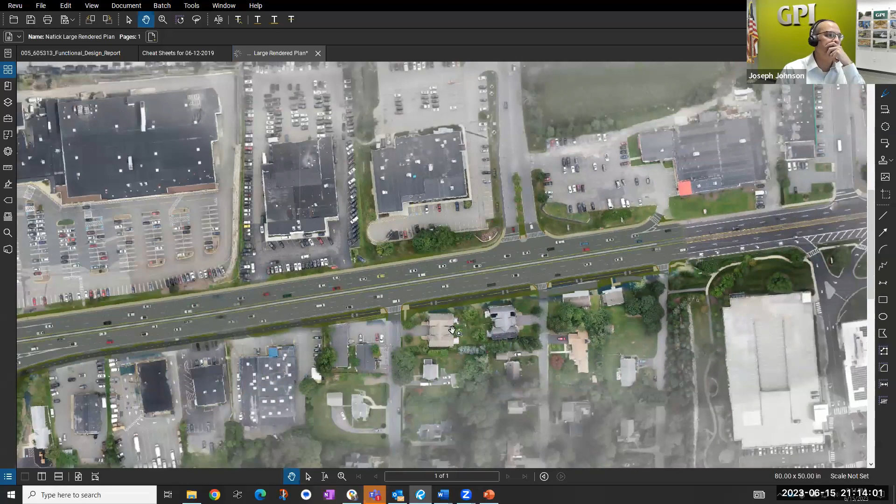Question from Joshua Margolis asking how long will the Route 9 construction take. Will it be for the full duration of the project?

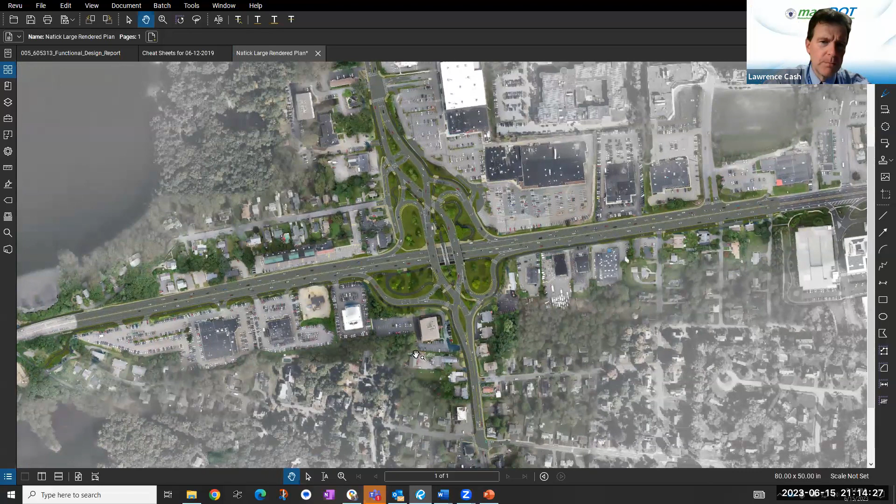That's a good question. I think the core of that would be around the interchange part, right Joe? And as you just described, the new sidewalks and shared use path. But as you get further away from the interchange, I would imagine that work is more minimal, and it would be really not impacted too much. It's really just right in the close vicinity of the bridges. That's where the heavier construction will be. But again, it's hard to guess how the contractor will phase it, because there are a lot of different ways they could go about tackling the concepts here. Agreed. Thanks, Larry, and thanks, Joshua, for your question.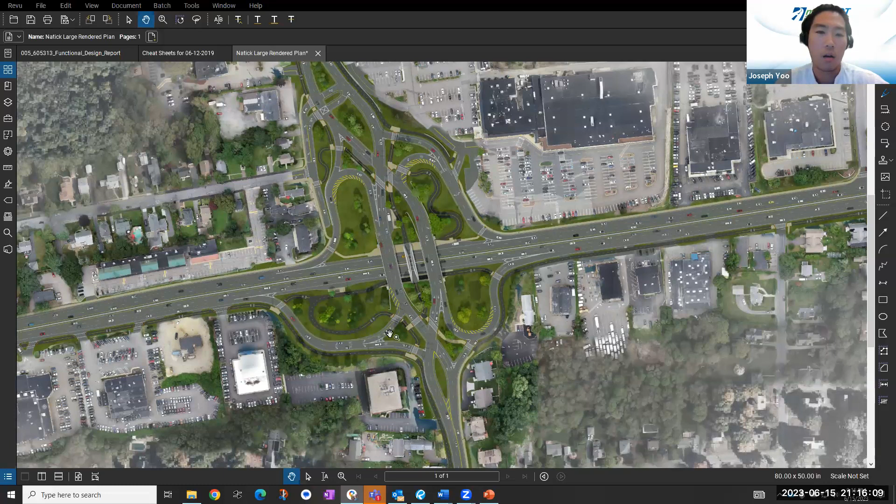Kevin Goldsmith, whose driveway is directly across from North Pleasant Street, has a question. He sees that the project is putting two lanes now in front of his house. As it is now, we compete with speeding traffic that doesn't stop coming off Route 9 East onto Route 27 South, and traffic coming out of North Pleasant Street. Now that the project is adding another lane for him to compete with, the question is how are you going to control the traffic coming off Route 9 and accomplish a void in traffic for the neighborhood safety and getting in and out of their driveways.

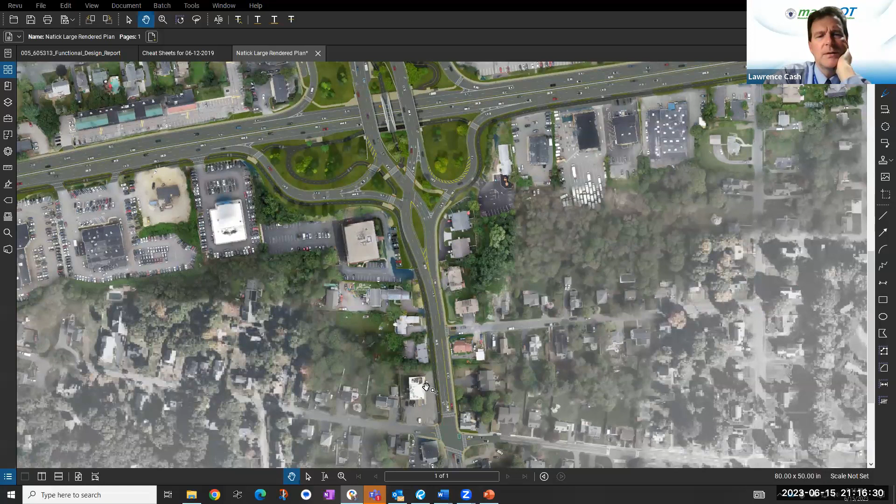So, Joe, you can go ahead and take it, but I believe the two lanes on that southbound North Main Street, one of them is for the left turn movement onto Bacon, right? No, that's a shared lane, so it can do both. But anybody that wants to take a left there, there might be times where that middle lane there has a little queue, as approaching Bacon, so that might actually help with the opening to get into North Pleasant Street.

Larry, I'll chime in a little bit here. I think the movement that's of concern is coming off the Route 9 eastbound ramp, how that comes in right here, and the issue is coming down this way towards Bacon. Right now, this movement off Route 9 eastbound is a yield control, but the radius here is very forgiving. If there's no one coming southbound on Route 27, a vehicle coming off the ramp can pretty easily just continue southbound without having to slow down much. What we're looking to accomplish with this design is actually make that movement a little bit more abrupt so that right turn is not a free flow move. First of all, this right turn lane will be signalized.

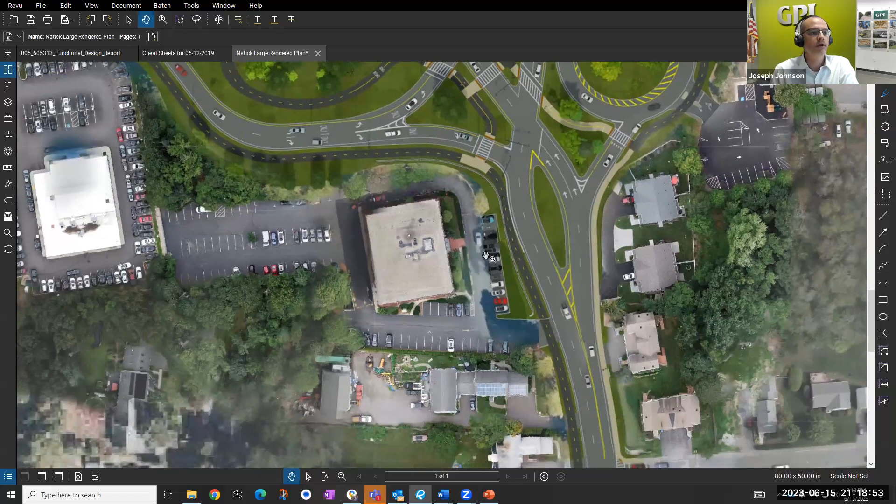It will be part of this traffic signal that is going to be installed here. So there will be times when this right turn will have a red indication and will not be able to proceed. That would be when the southbound through movement is going. Once the southbound through receives a red indication, then this would have the green. But again, this right turn would be coming more from either a stop condition or a slower speed, more like a 15-mile-per-hour turn, rather than maybe 25 if someone came through without having to yield to someone. So between having the signal at Bacon, which exists today, this will be a brand new signal that does not exist.

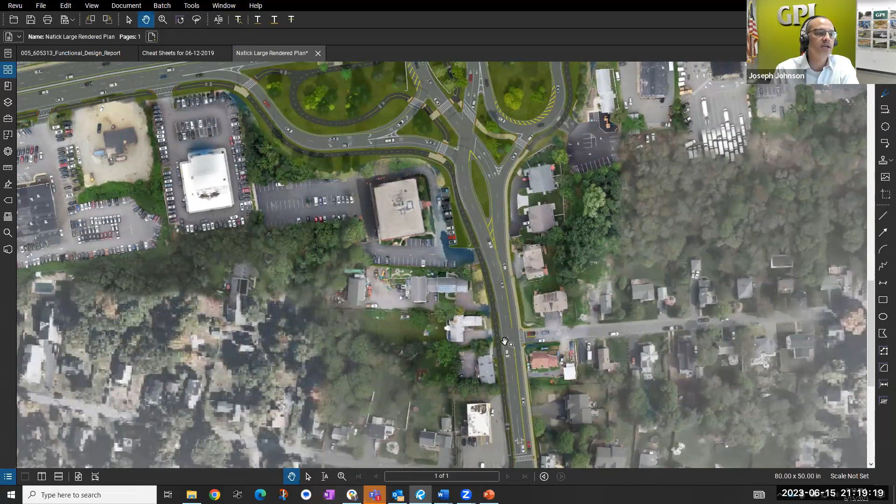Having a signal here will introduce gaps in the traffic stream so driveways in this vicinity will have more organized gaps created by the traffic signal to help facilitate moves out of your driveways. Also, with the two-lane approach coming down here, hopefully the queue won't block your driveway, which may be occurring currently. By adding the second lane, we expect to control the queuing so that typically you don't have excessive queues. It may on occasion queue back, but we don't expect it to reach the interchange.

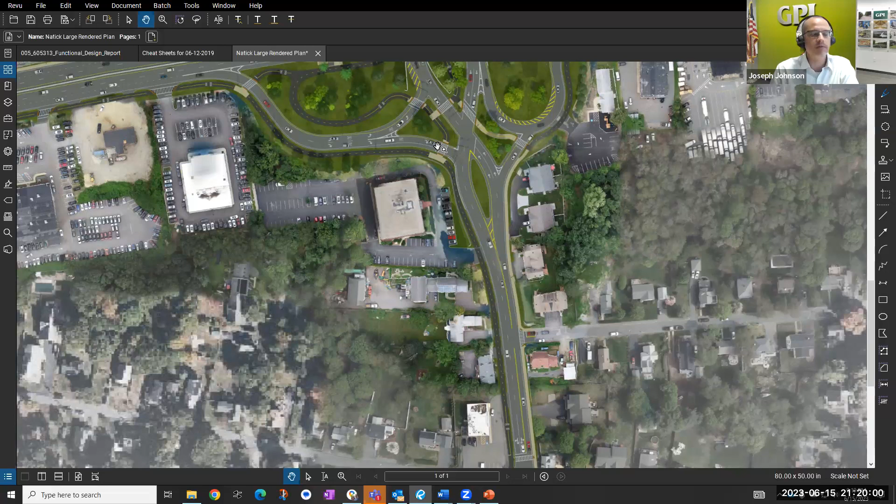With the geometry of this ramp being revised to be a bit tighter rather than a sweeping curve, that will help reduce speeds as well, since it will be signalized. So there will be times when this movement will have a red indication and is forced to stop and yield.

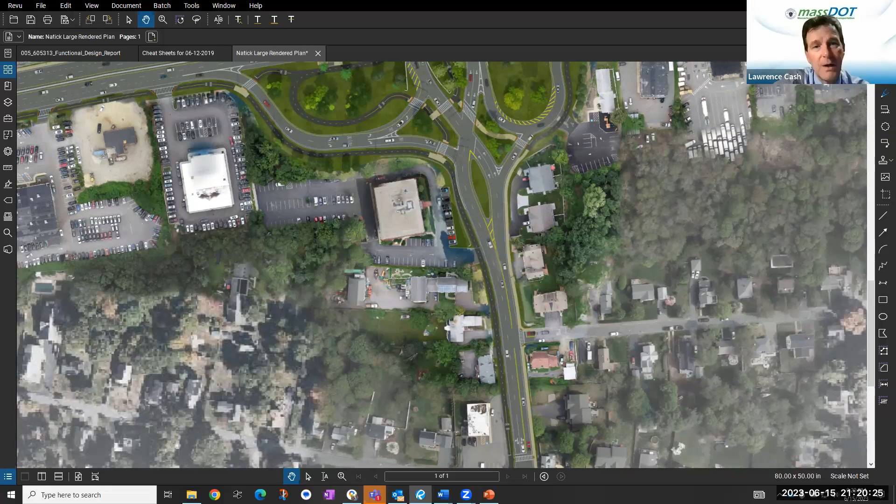Yeah, I was going to mention that too, Joe, that there would be some gaps created. Clearly you can see from that geometry that when the cars swing around, it's not quite like a T, but pretty close to it. So the radius is really tightened up, which will definitely slow down vehicles coming from that ramp. Thanks, Larry, and thanks, Joe.

Moving on, we have a question from Deborah Bryce. This is a follow-up question about the Route 9 widened sidewalks: will there be a fence or something from the bottom of Lakeshore to the rail trail entrance?

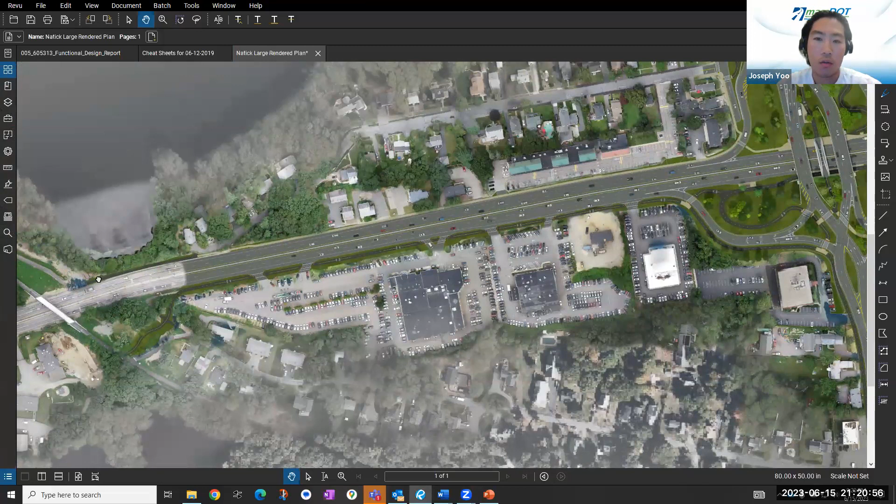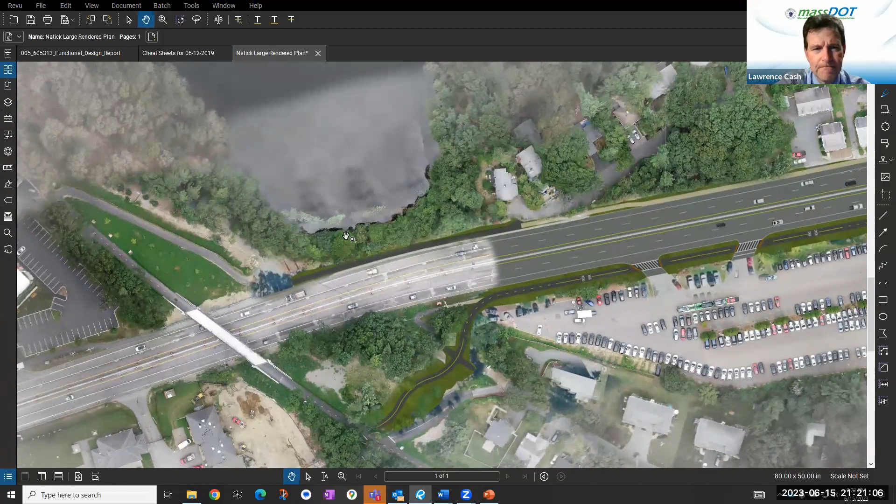Yeah, I can speak to that one, Larry. So this connection you see here in the dark gray, almost black, that'll be the paved area between Lakeshore and the Cochituate Rail Trail. We're proposing as part of the design essentially that same concrete barrier that exists in the middle of Route 9 on the edge of that dark section, to protect bicycles and pedestrians connecting from Lakeshore to the rail trail. There'll also be a fence on the other side, as one of the commenters noted, since it's a steep slope down to the lake. So there'll be a concrete barrier protecting people from Route 9, and a fence protecting people from the slope on the other side.

Thanks, Chris. We have our final raised hand from Simon. Simon, you can unmute yourself. Hello.

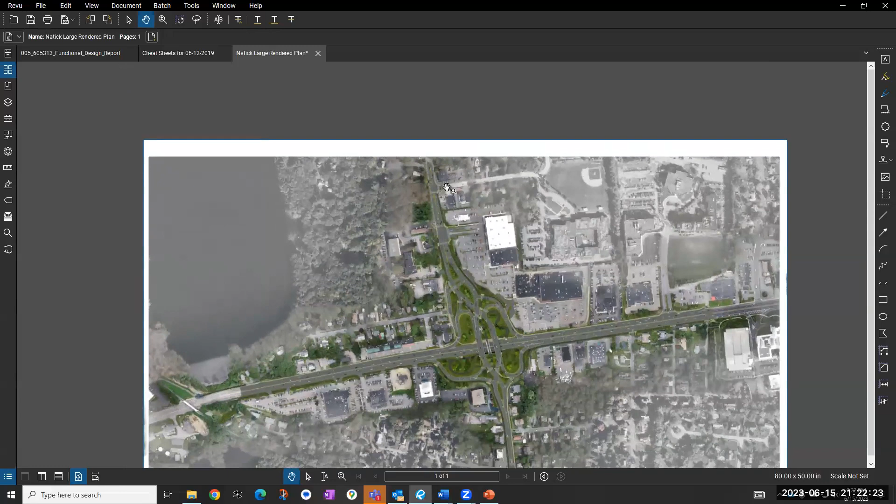Simon, from the operator of the gas station located next to Dunkin' Donuts in 27-9 Exchange Plaza. It was explained to me that there may be overhead cables and an additional pole installed over the same driveway alongside Route 27, where currently there isn't any overhead on that side of the road — the side going towards Natick Center. It was also explained to me that there may be the need, because of the overhead cabling being installed, for removal of the current sign placement further back into the property.

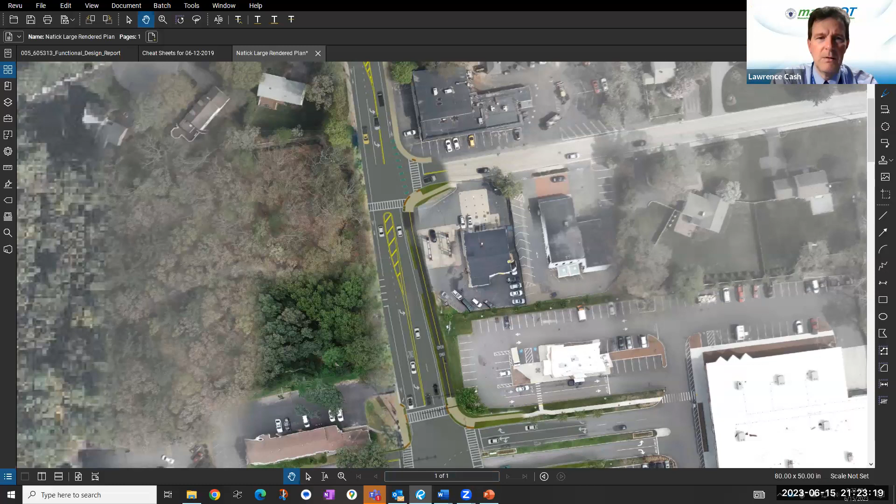Joe, was that eliminated when we decided to keep the poles on the same side of the park? I believe we're no longer making that crossing. Is that correct? That is correct, Larry. It just hasn't made it into the final design documents yet, but that is actively being revised, and we are not anticipating needing to relocate anything to the gas station side of the road in this location. The reason is that wooded area on the left of the photo, Mary Bunkle Park, a Community Park, is protected land, so we basically got rid of all easements on the parkland. As a result, we don't need to relocate the poles that were just placed under the active construction contract now. We did have a field meeting where we were going to be crossing from that location, as you described, Simon, but we're finding right now that we no longer need to do that, so that should eliminate the concern in your question.